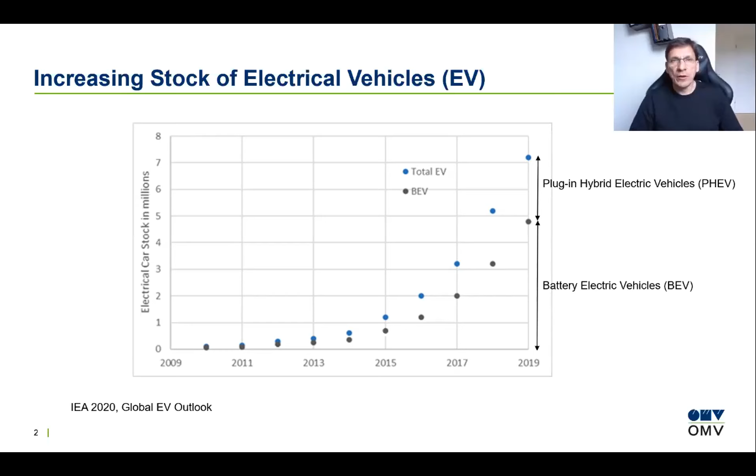In the last couple of years, we saw a strong increase in the electric car stock, now more than 7 million units. Most of these cars are battery electric vehicles, BEV, about 60%, and 40% are PHEVs. So what is the reason for this strong increase in electric vehicles? One of the reasons is the aim to reduce greenhouse gas emissions from private transport. But what are we actually doing when we shift away from internal combustion engines to electric vehicles?

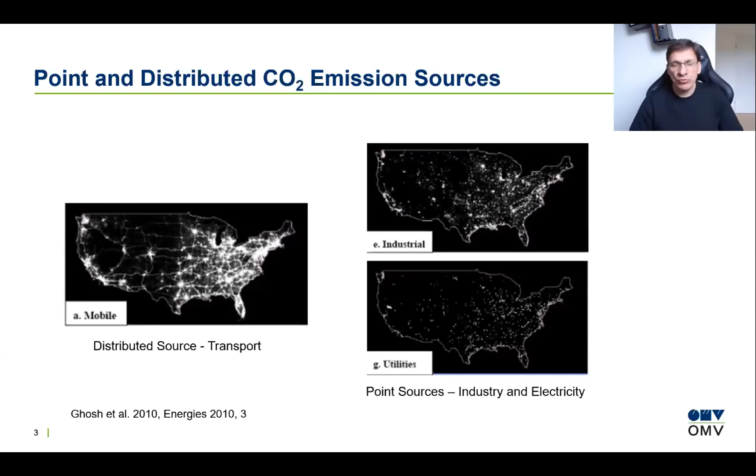There are two types of CO2 sources: distributed sources, for example public or private transport, shown on the left side. These sources are usually along roads and in cities, and they are very difficult to capture and reduce. And there are point sources, like industrial sources or sources from energy generation, where we could apply carbon capture and storage, for example. So what we are actually doing by having electric vehicles is shifting the distributed sources from the left to point sources on the right, which we will see in a moment in this presentation.

Here we compared three types of car users: small, medium and SUV car users. And we looked into three different types of countries: coal-dependent countries with high CO2 emissions of more than 700 grams CO2 per kilowatt hour, gas-dependent countries with 400 grams CO2 per kilowatt hour, and hydropower dependent countries.

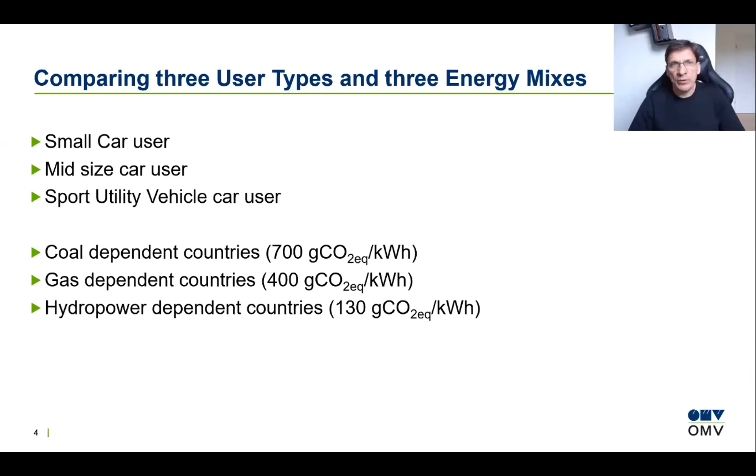So first we can compare the CO2 emissions from electrical cars with a certain electricity consumption in kilowatt hours per 100 kilometers to petrol cars with liters per 100 kilometers.

So if we take an electrical car with a consumption of 20 kilowatt hours per 100 kilometers on the y-axis, then we see this is equivalent to about 1 liter per 100 kilometers of a petrol car in a hydropower dependent country. For a gas dependent country, this increases to about 3, and for a coal dependent country, above 5 liters per equivalent per 100 kilometers.

What it means is if we are located in a coal dependent country and we are driving an electrical car which has a consumption of 20 kilowatt hours per 100 kilometers, it will at least emit as much as 5 liters as a conventional car with 5 liters per 100 kilometers. So this is the bare minimum it emits.

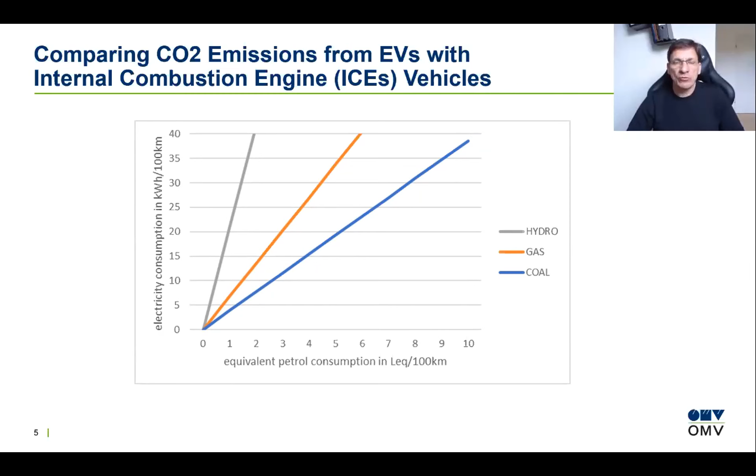In addition to that, we have the emissions from the battery construction. So here we are comparing CO2 emissions, incremental emissions, neglecting the emissions related to car manufacturing, as a couple of authors already showed that these are relatively equal for ICEs and EVs.

So on the left side we see the impact of different car types for gas-dependent countries. We start off with a legacy or an initial emission at year 0 because of the emissions related to battery construction. And then the slopes of the emissions depend on the car type and on the country type.

So here in the gas-dependent country, on the left side, figure A, we see that emissions from an SUV can amount up to 30 tons in the lifetime or in 10 years, even for a battery electric vehicle.

On the right side we see the impact of different electricity mixes, so here for a small car, emissions related to hydro power are small compared to other cases. Coal-dependent countries can have substantial emissions even for small cars.

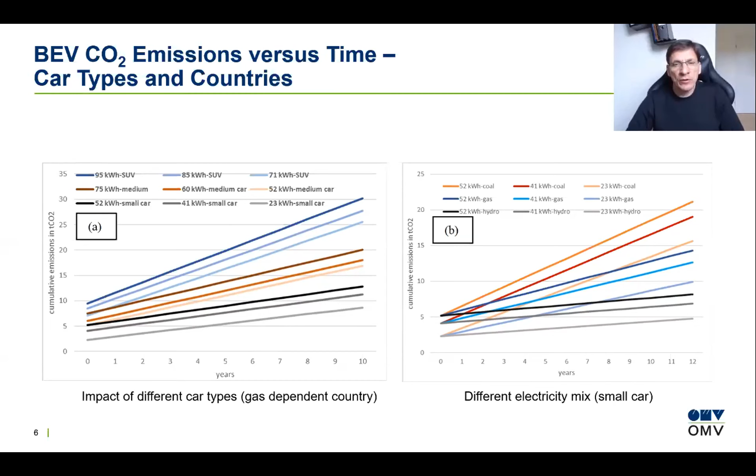For plug-in hybrid electric vehicles, there's one additional factor which we have to consider, and that's the electricity utility factor.

And first on this diagram on the left side we see the cumulative percentage of kilometers traveled versus driving distance. We see this type of diagram more often with the amount of trips versus percentage versus driving distance, and there the curve is increasing much steeper.

This means that only a very small percentage of trips is above 100 kilometers, and this is an important factor for battery electric vehicles because it gives us a feeling for how often we would need to change to other means of transportation or have to reload the car when we are traveling.

For PHEVs, the cumulative percentage of kilometers traveled is important, because here it says 50% of the trips have a cumulative driving distance larger than 35 kilometers.

Because we take into account that there are fewer trips, but with longer distances. And this can be used in addition to the driving patterns per day to come up with a utility factor, which means how many kilometers we are traveling electrically versus how many kilometers we are traveling with fuel.

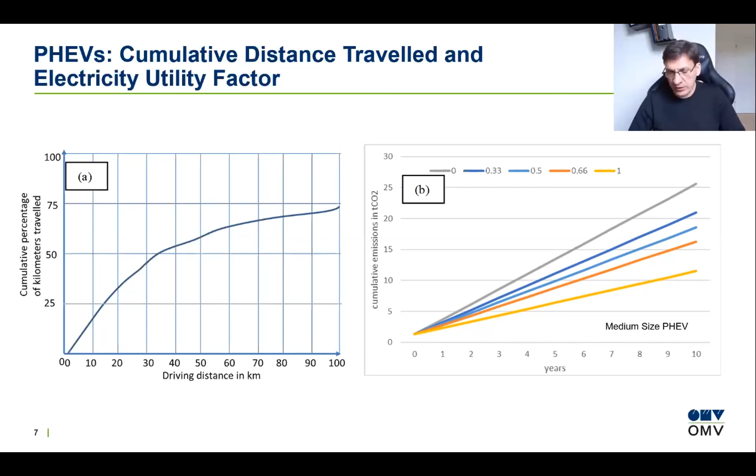So now when we compare the CO2 emissions of SUVs in this case, here we see on the left side for a hydropower dependent country, the ICE emissions, the orange dot would be 30 tons of CO2, lifetime CO2 emissions. BEVs have significantly lower CO2 emissions.

And PHEVs, for them it depends strongly on the utility factor. So for a 50% utility, the CO2 emissions would be above the BEVs.

The blue bars show the break-even time in years, and here, because of these initial CO2 emissions related to the battery construction, the break-even time for BEVs is somewhat longer than for the PHEVs. We also see that the break-even times, as well as the CO2 emissions, increase for larger battery sizes.

For coal-dependent countries, the situation changes. So in particular for larger size batteries in BEV cars, we have higher CO2 emissions for a lifetime or 150,000 kilometers compared to an ICE.

For PHEVs, they might be better off, in particular for higher electrical utilities. And the break-even times are significantly increasing for BEVs for coal-dependent countries.

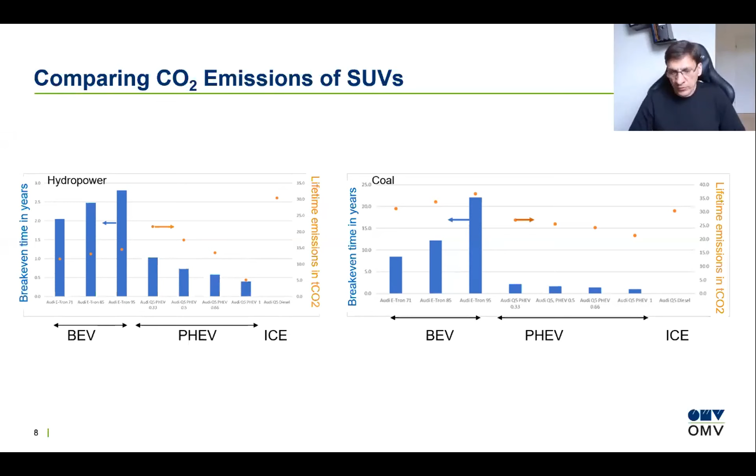Let's have a look at the sensitivity. So in a hydropower-dependent country, for BEVs, the strongest, highest sensitivity is related to battery production emissions. And we have less sensitivity with the dependency on the electricity mix or electricity consumption. The reason is, of course, because the energy mix is already so good.

With coal-dependent countries, we see that the lifetime emissions are significantly increasing compared to hydropower, and also the sensitivity increases. Here, the key parameter would be the electricity mix. So first of all, the electricity mix would be a good target to decrease the CO2 emissions from the electricity mix.

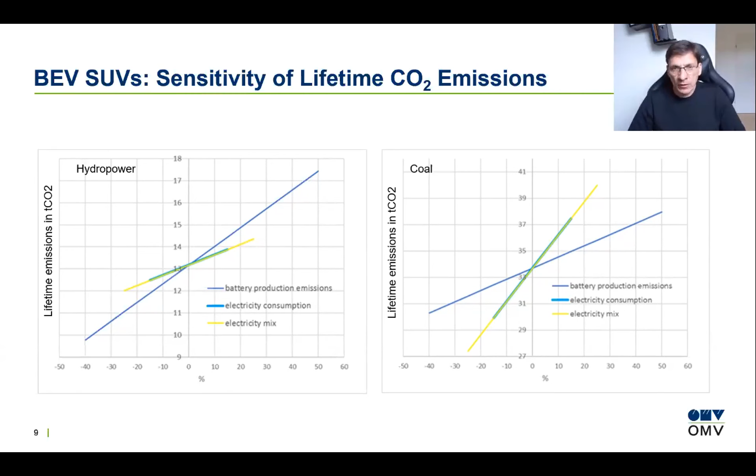For PHEVs, in both cases, the highest sensitivity is for hydropower, and coal and gas dependent countries in between, is fuel consumption. For hydropower, because the electricity mix is already so good, the sensitivity is not that strong for battery production, electricity consumption, and mix.

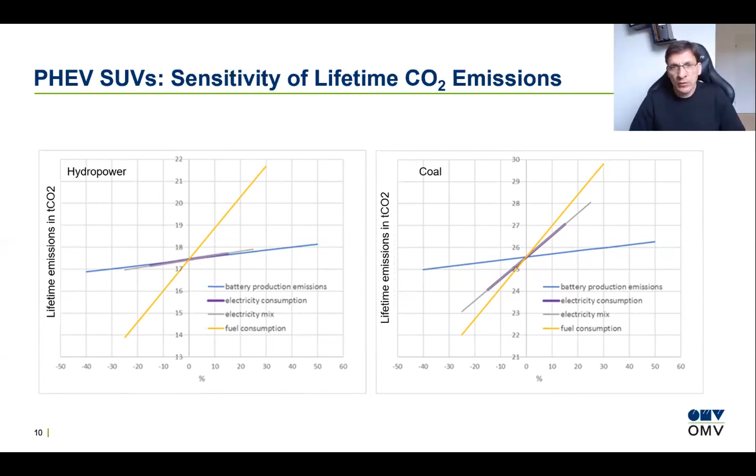For coal, the sensitivity of electricity consumption is almost as high as the sensitivity for fuel consumption. So it changed significantly from the hydropower dependent country.

So if we look at the generation of electricity, then there should be a big drive towards renewable energy, and there are, of course, different sources for renewable energy. Here is a case for solar energy in Austria. So we see on the left-hand side that most of the solar energy is generated at roughly 12 o'clock, with a decline in the morning or in the afternoon.

This pattern fits reasonably well to the percentage of cars traveling. So we see that at midday there are fewer cars on the road, so they would be there for charging. But there will still be a mismatch because most of the cars will, of course, be available later and will be charged later in the afternoon.

If we look at the difference between summer and winter, then there is a significant difference in the electricity generation. So this difference in electricity generation, we have to store. Wind energy is also not very stable, and the energy has to be stored.

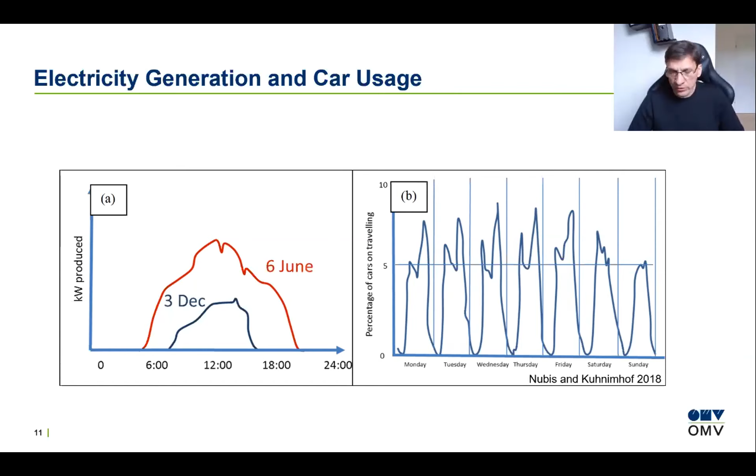How can we store energy? We could use pumped hydro, we could use compressed air energy storage, or hydrogen. For larger amounts, as we might need for deep decarbonization of public transport and private transport, hydrogen might be the method of choice. So we could store it in reservoirs and produce it back.

Another option is to decrease the CO2 intensity by CO2 geological storage. In view of time, I didn't cover that here. And that is in particular important for coal-dependent countries.

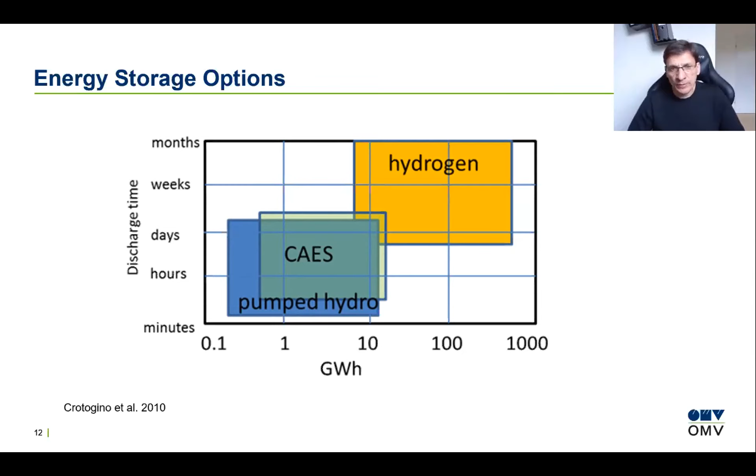So, as conclusions: EVs, when we use them, result in transferring distributed CO2 emissions to point sources. In most cases, EVs lead to a CO2 emission reduction compared to ICEs. For hydropower-dependent countries, substantial CO2 emission reductions can be achieved. The highest sensitivity is battery-related CO2 emissions, so these have to be tackled first.

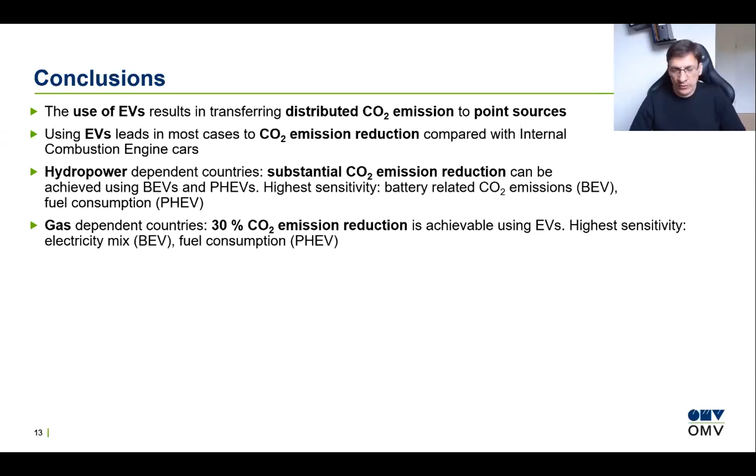For gas-dependent countries, about 30% CO2 emission reduction in our cases is achievable using EVs. Highest sensitivity is the electricity mix and fuel consumption for the PHEVs. For coal-dependent countries, the emission reduction for BEVs is limited, and in the worst case, the CO2 emissions might even increase for BEVs, in particular when they have large batteries. PHEVs, however, might still reduce emissions. Highest sensitivity is electricity mix and fuel consumption.

What we would need to judge the amount of CO2 emitted would be, in addition to the Worldwide Harmonized Light Vehicle Test Procedure, the fuel consumption of a PHEV driven with petrol only, and the electricity consumption of the PHEV driven electrically only. In addition, the CO2 intensity of the energy mix in the respective country should be given.

CO2 geological storage can be used to decarbonize the electricity mix, and this works in particular for coal-dependent countries, because in coal-fired power plants we have higher CO2 concentrations in the exhaust gases, which can be more easily captured and stored.

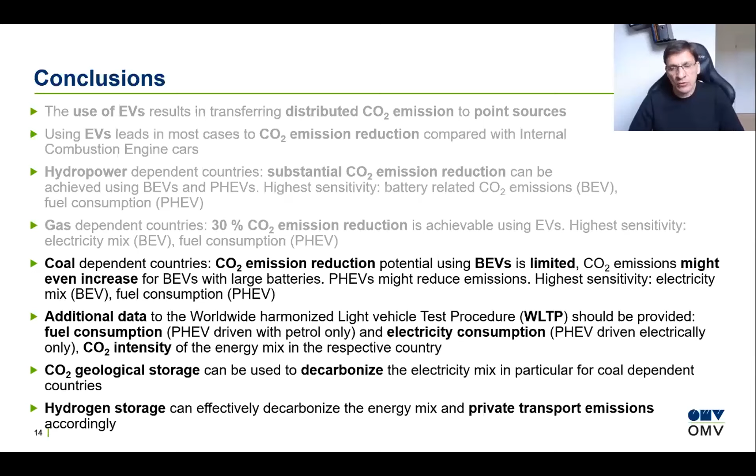Hydrogen storage can be a very effective way of decarbonizing private transport and the energy mix. With this, I would like to thank OMV E&P for the permission to publish the paper, and I'm looking forward to receiving questions. Thanks.

Maybe one more question from Habza Abid: as compared to ICE vehicles, do you take into account the reduction of components in battery electric vehicles?

No, we neglected this part. I've read a couple of articles where the difference was not that big, but this is something which should be taken into consideration. I guess it's a more second order effect.

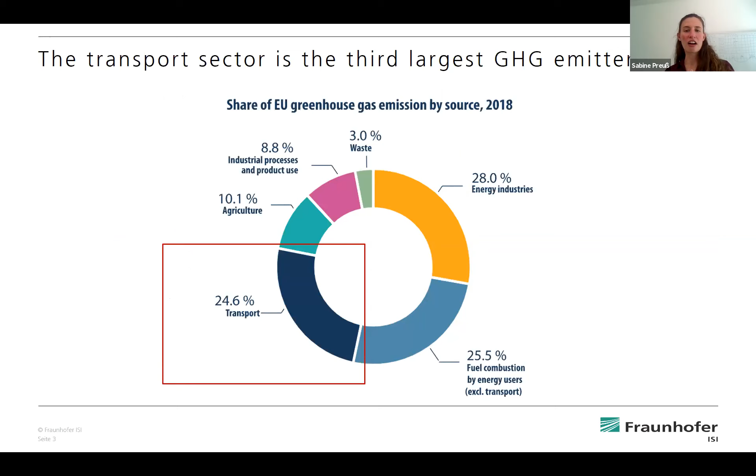However, there are alternatives, as you all may know, and especially after the last talk, you probably are aware of the different types that we have. We definitely need electric vehicles for the energy transition and for a sustainable future. So this talk will especially focus on these three types of electric vehicles.

So there are plug-in hybrids, which can be driven electrically or with conventional fuel like diesel. Then there are battery electric vehicles, which are completely battery electric. And the last one, especially important for our second study, are hydrogen vehicles, which are also electric vehicles but powered by hydrogen. They have the advantage that there are no long charging times.

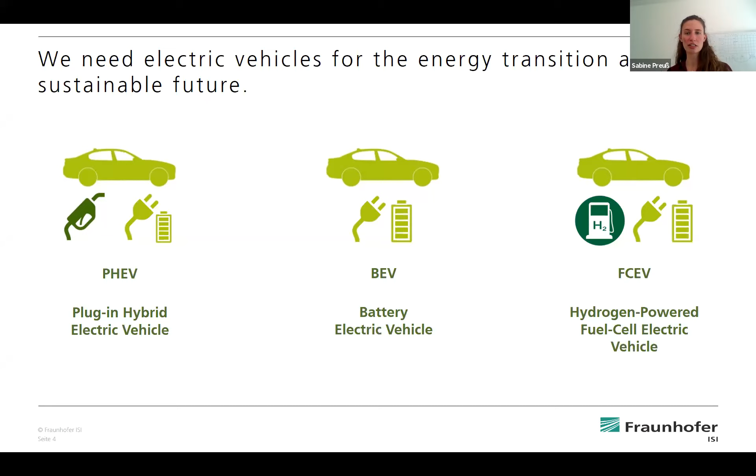So there are promising options to tackle climate change and reduce emissions in the transport sector. But if we look at the sales share in the EU for electric vehicles—battery electric and plug-in are often summarized as electric vehicles—worldwide the sales share is still below 5%. There is a steep increase from 2019 to 2020, but still it's really, really low. We are far away from our goals.

And of course we need to find ways to improve this adoption intention, or the adoption of battery electric vehicles. There are many variables that impact adoption intention, for instance different policies and subsidies, public funding. Also the context plays an important role. There's research that income and different socio-demographic variables have an impact. And there are also individual variables, for instance the perceived usefulness of electric vehicles.

And one of those individual variables may also be knowledge. So knowledge is the most important variable in this talk. And as I said, it is an individual variable, for instance such as perceived usefulness.

One theory that covers some individual variables pretty well is the diffusion of innovation theory by Rogers. For instance, it was found that compatibility in the theory has an impact, but also trialability, which is closely connected to knowledge. So the question that raises is, how exactly do we define knowledge?

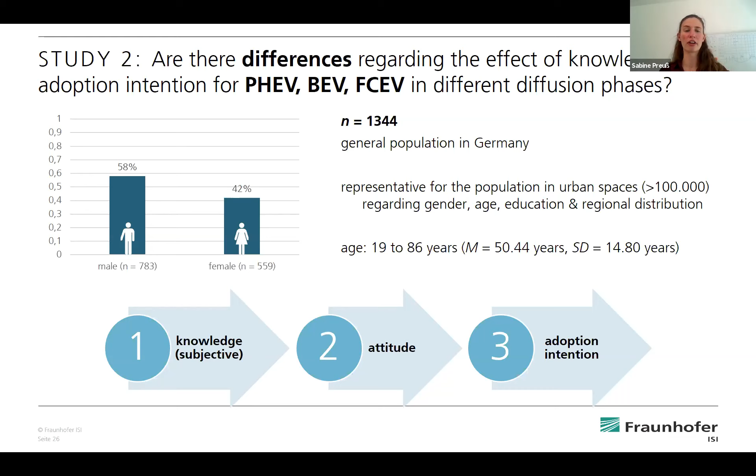And what did we do again? We had almost the same number of people, 1,344 from the general population, and this time it was representative of the population in urban spaces—regarding gender, age, education, and also regional distribution in Germany. The mean age was about 50. And this time we also adjusted the order of the different measures, and we replaced the measure of adoption intention to make it more methodologically sound.

What we found is that we replicated the results. Again, there is a direct and an indirect effect from knowledge on adoption intention, and this is true for all three types—not only for battery electric vehicles and plug-in hybrids, but also for hydrogen vehicles. The numbers are comparable, but for hydrogen vehicles the coefficients are even a little higher, which is surprising, I think.

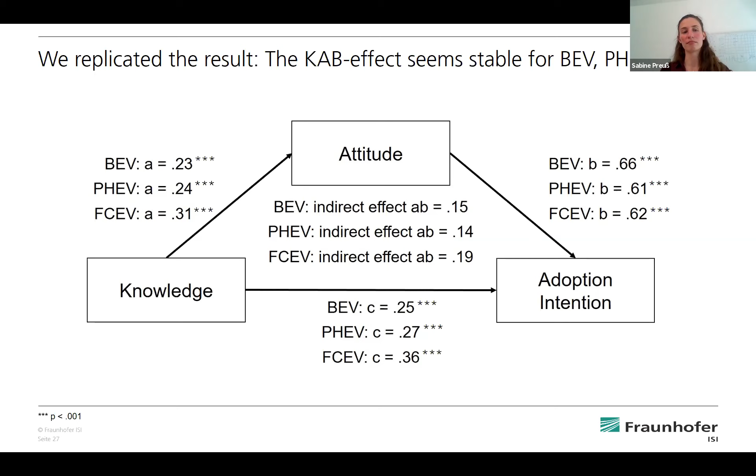It's also important to note that the descriptive statistics really significantly differed between the three types of electric vehicles. To sum up, in the second study we found again the direct and indirect effect for the different types of technologies in the different diffusion stages. So this replicates the results from earlier research, as well as our own research.

It also extends our findings a little, because now we know it can be transferred, and that it applies in study one for both subjective and objective knowledge. What we could have changed: there are no hydrogen vehicles yet available, or only partly available, so it's all a little hypothetical. Also, we measured adoption intention and not real adoption, and we only considered one mediator, attitudes. If you think back to the theory, it suggested we should consider several variables as mediators, so it could be helpful to add additional mediators to our model.

So, to answer the overall question—does knowledge really impact adoption intention or not—we can say yes, it does. But what can be looked at in the future is whether adoption intention can also be impacted for other technical innovations, and whether attitude and knowledge play an important role there.

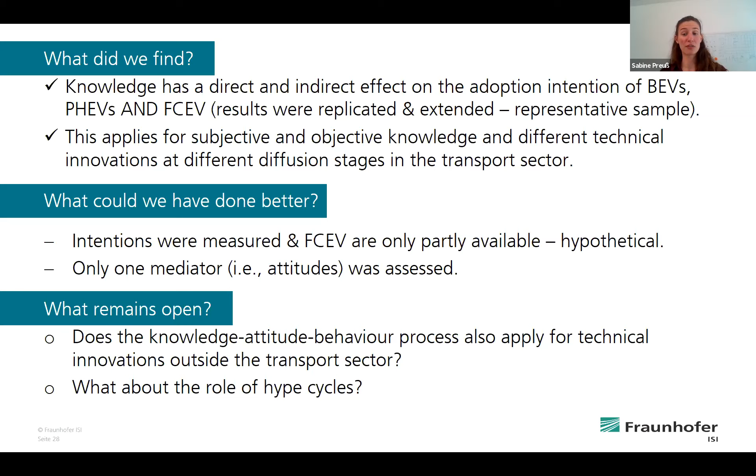And also the role of hype cycles and the media—is it important to really have this knowledge transfer for different vehicles and different types of vehicles? That should be tested in the future.

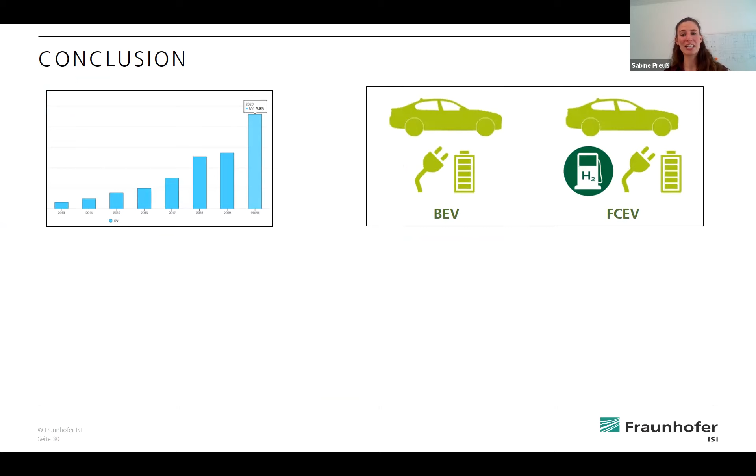So as a final conclusion: to accelerate the diffusion of sustainable cars, we don't need to consider the diffusion stages, but we should definitely consider knowledge. We recommend achieving subjective as well as objective knowledge, as well as creating a positive attitude, because all three had a significant impact on the adoption of electric vehicles and their different types.

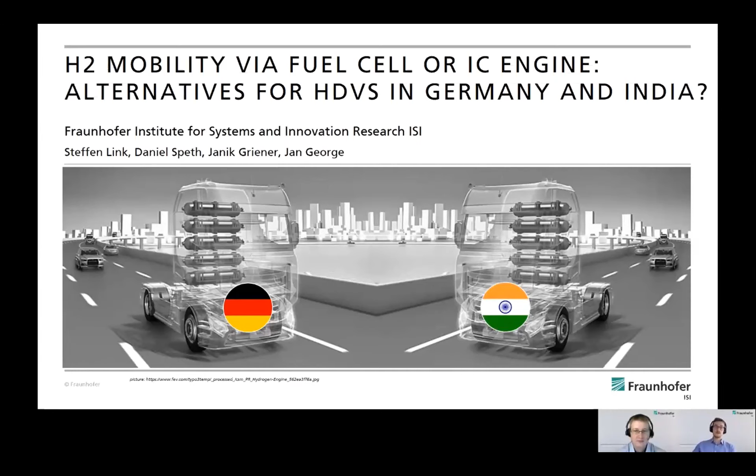Hello and welcome to our presentation. Today my colleague Daniel Speth and myself, Steffen Link, will give you some insights into our latest research project about fuel cells and hydrogen internal combustion engines to decarbonize road freight transport by heavy-duty vehicles. As global warming potential and environmental protection should concern everyone in the world, we will consider Germany as representative for a highly industrialized country and India as an emerging and fast-growing market.

The agenda for today: I will first tell you about our motivation, then subsequently about the methodology and the data we've used. Then I will hand over to my colleague Daniel Speth, who will tell you about our economic calculations for Germany and India. And then eventually I will conclude the presentation today.

About our motivation: on the left side you see the CO2 emissions by origin or producer. As you can see, transport is responsible for between 13% and nearly one-fifth of total CO2 emissions in India or Germany, whereas a huge share of these are emitted by heavy-duty vehicles, even though they only account for minor shares in the total vehicle stock - in Germany only about 10%.

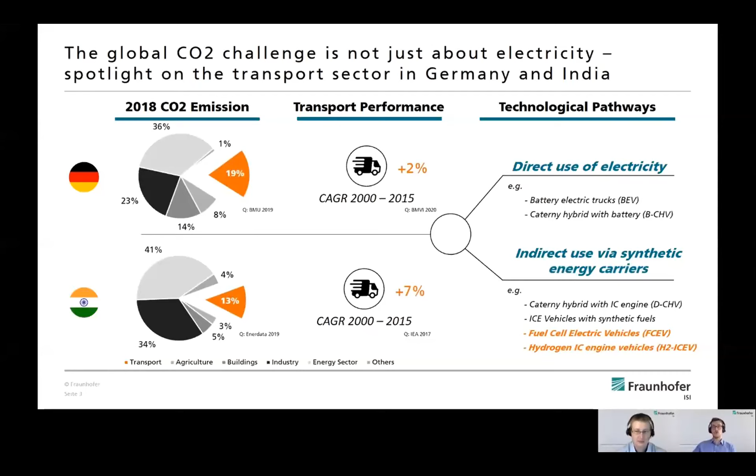What's aggravating the situation is indicated in the middle: road freight transport steadily and continuously increases. This is indicated by the CAGR, the average annual growth rate - for Germany, from 2000 to 2015, 2% per year, and for India even 7%. To decarbonize road freight transport, 2 technological pathways exist, and today we focus on the second path, which is the indirect use via synthetic energy carriers. Here we especially focus on hydrogen-powered vehicles, either fuel cell or potentially a hydrogen combustion engine.

About our methodology: our approach follows 6 major process steps. We first start with data collection, then statistical evaluation of this data - we adopted a meta-analysis and learning rate approach. Following that, we have the main part, the techno-economic calculations. Subsequently, we validated these with related studies and expert interviews, with experts from big OEMs, shippers, and carriers. This eventually leads to economic results, which, as an outlook, I will show you at the end of the presentation, and would ultimately lead to a market diffusion based on these costs.

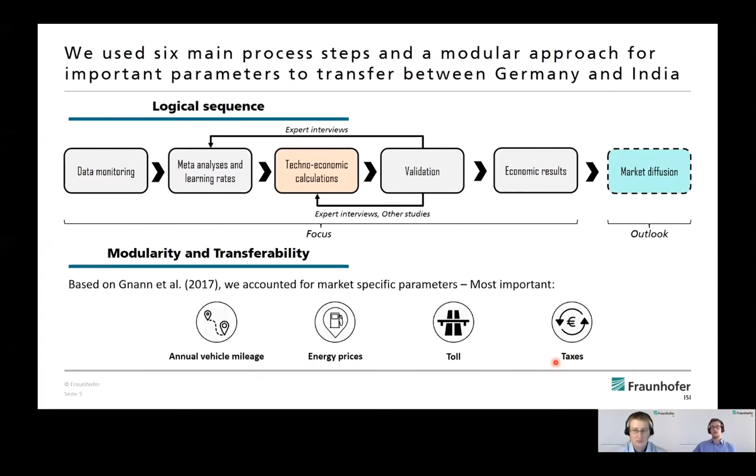Now let's come to our meta-analysis, which summarizes hundreds of different data points from other studies, expert interviews, and different sources. On the left-hand side you see the meta-analysis for fuel cell system costs, and on the right-hand side for hydrogen storage type 3 and type 4, which is highly compressed yet gaseous hydrogen.

You see the big spread here, which means there's high uncertainty. This is apparent, and it's also the reason why we did such an analysis and did not simply pull out any single data point from any study, to especially account for this uncertainty.

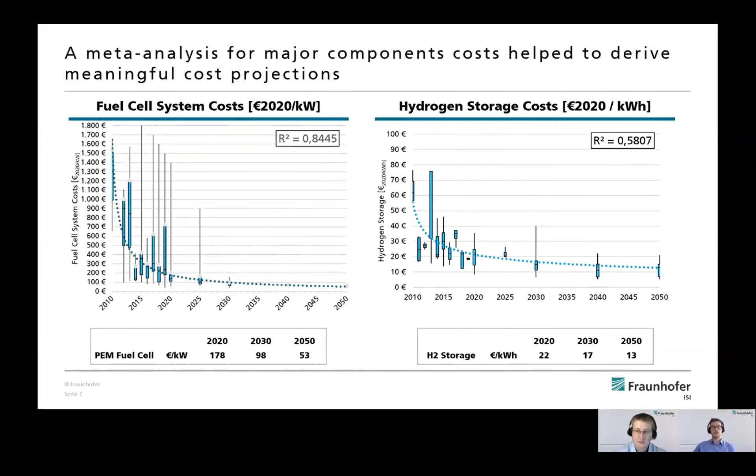Now let's come to the hydrogen ICE engine, which might be a possible enhancement for current diesel engines, because it's a concept based on conventional diesel engines where you have to adjust major systems like the ignition system, the fuel system, and engine control. You have to adjust the combustion process, but it's basically the same engine.

Ultimately, you can reach a higher efficiency. You have no CO2 emissions and only low NOx emissions. And what's a charming option is that you can adapt it very easily to existing engine production, and it's more durable than, in comparison, a fuel cell system.

What's a shortcoming today is that there's no real cost assessment available, which is why we've chosen a learning rate approach and used the similarity between the diesel engine and the hydrogen engine, determining the parameters from current EU6 diesel engines, yet scaled to a low volume hydrogen ICE production.

On the right-hand side you see our technical analysis and assessment based on individual component efficiency, and on the left side the total powertrain efficiency, which is lowest for diesel and highest for the fuel cell EV. As indicated here, the hydrogen ICE has a higher efficiency than the diesel engine.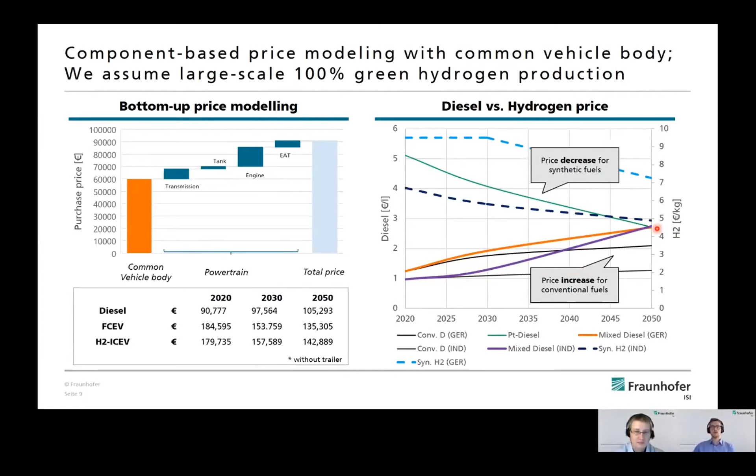There are two reasons for this. First, the purchase price for H2ICE and fuel cell electric vehicle will be higher than for diesel vehicle, even in the long term. Second, the energy costs for hydrogen, especially synthetic hydrogen, are quite high today, even though we considered the price cap in Germany.

However, sensitivities show that the fuel cell electric vehicle could be cost competitive in 2030 when driving high mileage due to comparatively high energy efficiency. In the long-term perspective, 2050, both hydrogen vehicles will be cost competitive compared to the diesel vehicle. Higher efficiencies and lower fuel prices make this possible.

They benefit from the possibility of making synthetic hydrogen available at a lower price than synthetic diesel. The fuel cell electric vehicle will come close to the TCO of today's diesel vehicle, even though we assume the comparatively high hydrogen price, approximately above 7 euros per kilogram.

Finally, from a cost perspective, the H2ICE is not competitive to the fuel cell electric vehicle under similar conditions due to its lower efficiency and a bigger hydrogen storage as a cost factor. However, if the range can be reduced, the H2ICE could be economically feasible. Additional aspects, like robustness, for example, for construction vehicles, could be an argument in favor of the H2ICE.

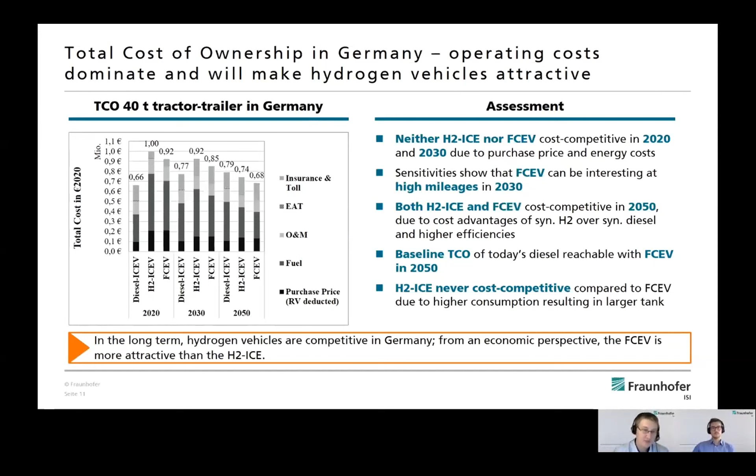Now you can see the same figures for India. The general trend corresponds to the development in Germany. Neither the H2ICE nor the fuel cell electric vehicle will be cost competitive to the diesel until 2030. In the long-term perspective, however, they will be the better solution in India too.

Due to lower vehicle mileage, approximately 75,000 kilometers per year, the total TCO per vehicle is lower. This is supported by low energy prices. The higher influence of the purchase price is a disadvantage for the more expensive hydrogen vehicles. However, the H2ICE with a comparatively cheap drivetrain could profit if the vehicle range, and with the range the tank volume, could be reduced. But in general, the overall assessment is quite similar to Germany.

Finally, I'd like to share some sensitivity calculations with you. I will present the results for Germany. However, the results for India are somehow similar and we added them to the paper.

On the left-hand side, we varied the annual mileage, the fuel price, and the vehicle purchase price by plus or minus 20%. Typically, the TCO of commercial vehicles is strongly influenced by operating costs. As you can see here too, the annual mileage has got the highest influence, followed by the fuel price. The effect is even stronger for fuel cell electric vehicles in the lower figure due to the higher efficiency.

For example, a 20% fuel price reduction reduces the TCO of the fuel cell electric vehicle by 10% and makes the vehicle cost competitive to the diesel. On the right-hand side, we calculated the necessary price reduction for the H2ICE to become cost competitive with the fuel cell electric vehicle. It amounts to approximately 38%, or more or less 50,000 euro.

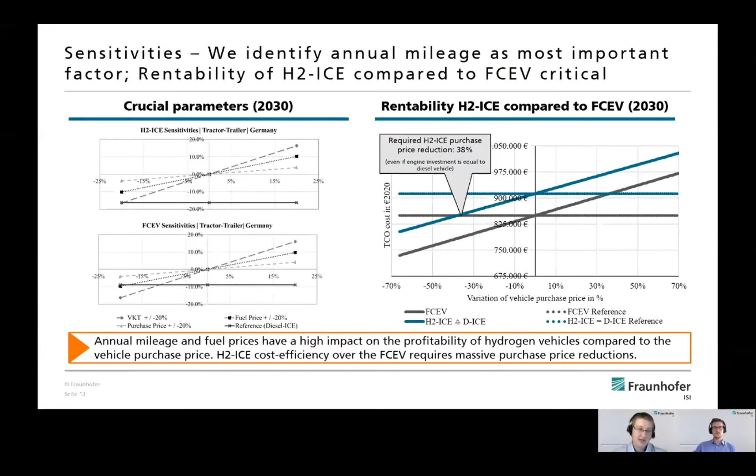This is roughly equivalent to the cost of the hydrogen tank in 2030. So all in all, the fuel price and the annual mileage are the most important factors to make hydrogen vehicles economically feasible. To make the H2ICE competitive with the fuel cell electric vehicle, massive purchase price reductions are additionally needed. So far, our main findings, and now Steffen will go on.

Thank you, Daniel. Let's conclude the presentation for today. What we find is that the fuel cell electric vehicle outperforms any hydrogen ICE and outweighs potential higher acquisition costs due to its higher reachable operating efficiency and its potentially lower mass market production costs.

What we also find, and what's very substantial, is that the costs for hydrogen storage are in some cases higher than the rest of the total powertrain, especially for the considered Type 3, Type 4 tanks here. So basically, as Daniel already indicated, there might be a technological change, as introduced by Daimler, to use liquefied hydrogen, or simply reduce the operating range from 1,000 kilometers to, let's say, 600 kilometers with one full tank.

What we also see, and that's already indicated by Daniel too, is that the hydrogen ICE might be an interesting gap technology because it increases the profitability of potential hydrogen refueling stations, accelerates and prepares the market diffusion of potential fuel cell electric vehicles. And because it's a more durable technology, especially for applications where the fuel cell might not be suitable due to problems with clean air, shocks and vibration, like for example in the construction industry, the H2 ICE engine might be a promising technology.

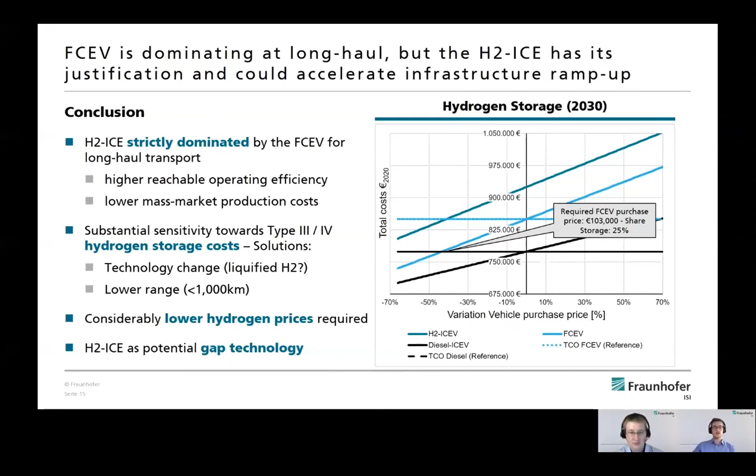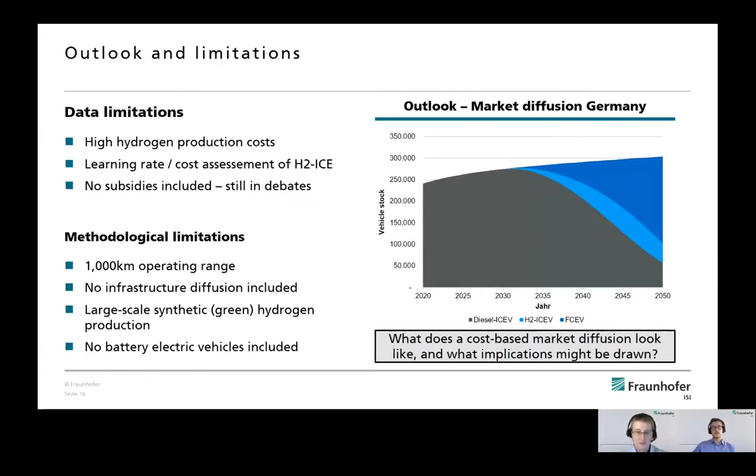As indicated here in the outlook for market diffusion in Germany, you see the three technologies, which is basically diesel, H2 ICE, and fuel cell, with a potential cost-based market diffusion. And what's apparently missing is battery electric vehicles, which are not included in our research up to date.

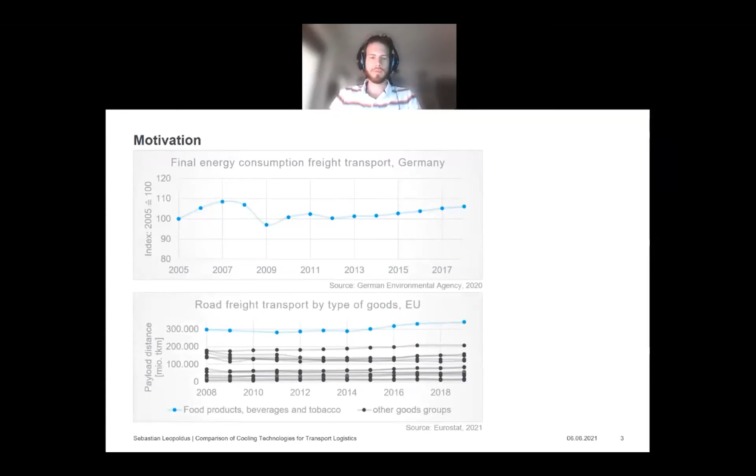Here you can see the final energy consumption in freight transport in Germany. After some ups and downs, it has constantly risen in recent years. If you look at the payload distance of road freight transport by type of goods in the EU, you will see that the goods group food products, beverages and tobacco is in first place ahead of all other goods groups. Moreover, about 1/3 of all food products transported require either cooling or refrigeration.

Today's standard technology for refrigeration on trucks is vapor compression refrigeration, abbreviated as VCR. About 90% of these VCRs are operated via a dedicated diesel engine, which produces relatively high greenhouse gas emissions. To achieve the energy and climate targets of the EU, further research on alternative cooling technologies is needed.

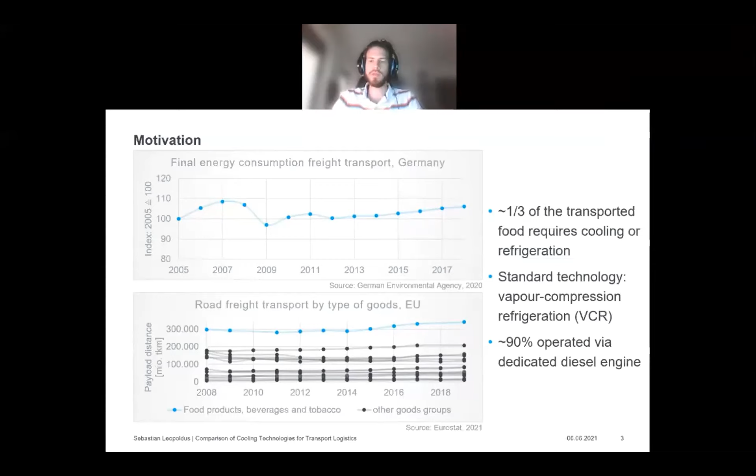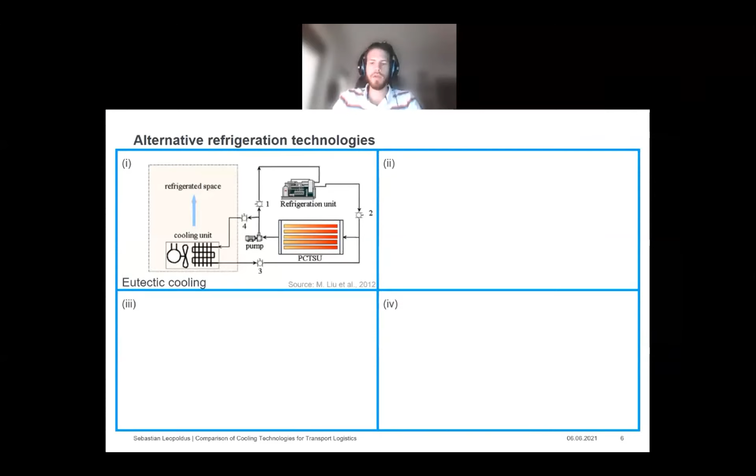In the following, I would like to present the alternative refrigeration technologies that I used for my comparison. The eutectic system consists of an on-vehicle phase change thermal storage unit, the PCTSU, which contains the phase change material, PCM, and an off-vehicle refrigeration unit, which is powered by electricity. The refrigeration unit charges the system, causing the PCM to change its phase from liquid to solid. When the truck is in operation, the PCM will change from solid to liquid, releasing a cooling effect and discharging the system.

Cryogenic cooling is achieved by the evaporation of cryogenic liquids, which are pumped from a tank to the sprayer unit that releases the liquids directly into the refrigerated space. As cryogenic liquids, I considered liquid CO2 and liquid nitrogen.

The next system is a vapor absorption refrigeration system, marked in yellow, coupled with a solid oxide fuel cell, marked in red. The vapor absorption system is similar to the VCR, but the mechanical compressor is replaced by a thermal compressor, shown in green. The thermal compression is carried out through a mechanism of absorption and desorption. The required heat in the desorber is provided by the fuel cell.

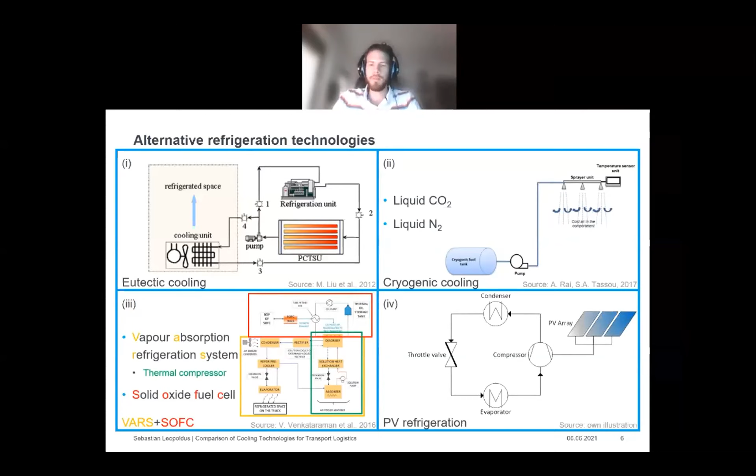The last system is the conventional VCR system, but the compressor is powered by electricity generated in PV cells mounted on the roof of the truck instead of an auxiliary diesel engine.

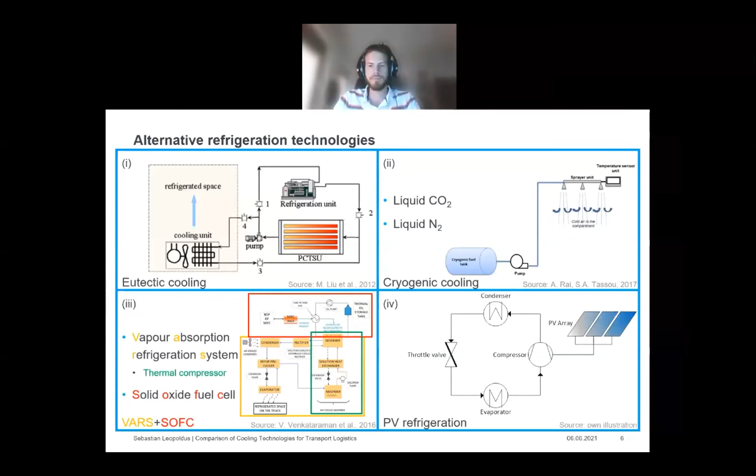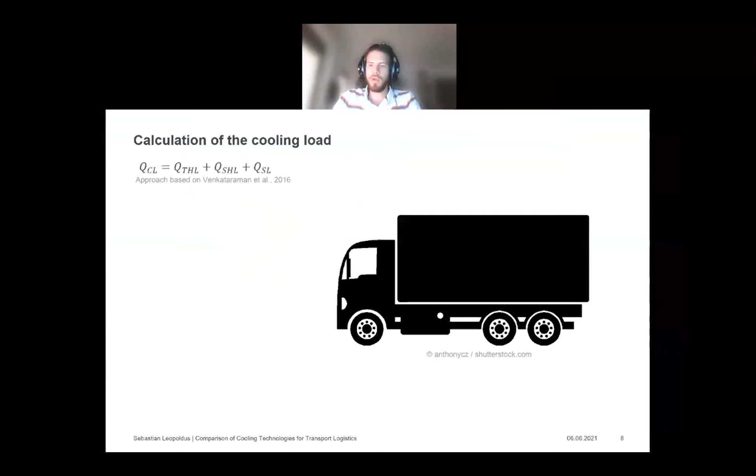Now I would like to explain how the required cooling load is calculated. For the calculation of the cooling load, 3 different heat sources are taken into account. First, the transmission heat load. It describes the amount of energy that penetrates the refrigerated space according to Fourier's law. It is a function of the surface area of the truck, the temperature difference between the ambient and the refrigeration temperature, and the thermal transmittance of the truck.

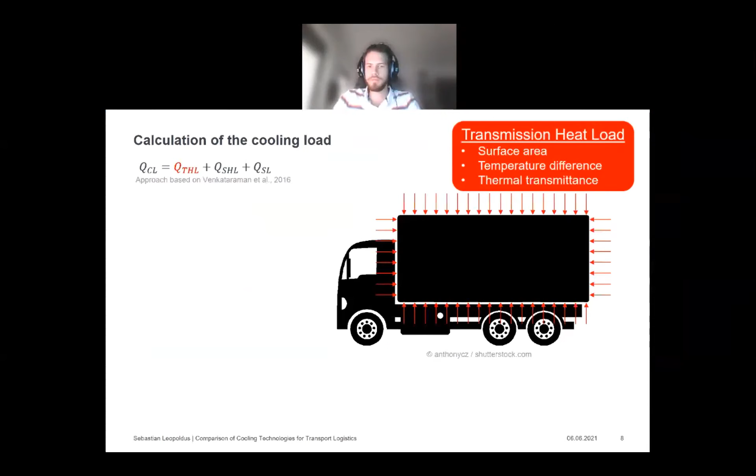Second, the service heat load. You can see the green arrows located at the back of the truck. It describes the energy intake caused by door openings. It is a function of the internal volume not occupied by cargo, the enthalpy change, and the time between door openings.

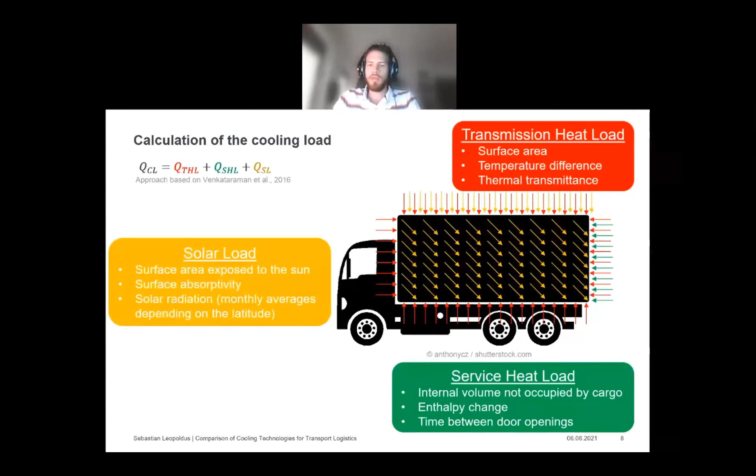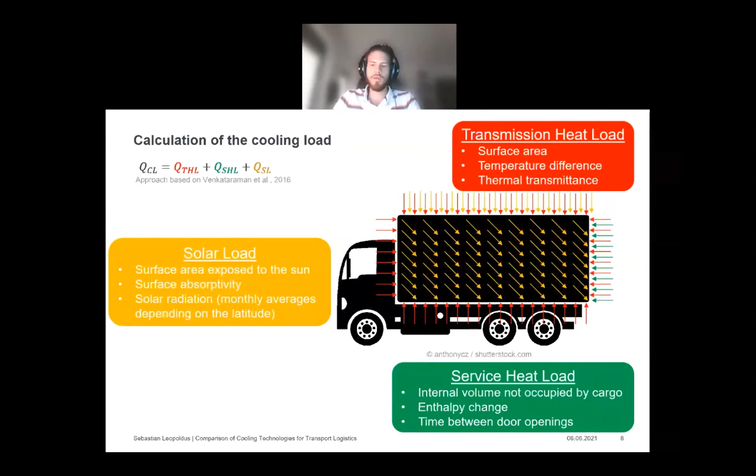And third, the solar load. This is the amount of heat penetrating the refrigerated space due to solar insolation. I assume that the roof of the truck and one of the sidewalls are always exposed to the sun. Other relevant parameters are the surface absorptivity of the truck and the solar radiation, where I use monthly averages that depend on the latitude.

Next, I would like to present the scenarios that were studied. I have considered two scenarios for a long-distance delivery characterized by a high average load, long times between door openings, and long duration of door openings, and two short-distance deliveries with a low average load, short times between door openings, and short durations of door openings. For both cases, a temperature of 0 degrees and minus 20 degrees Celsius is assumed, resulting in 4 scenarios. In addition, 2 different latitudes are considered: Hamburg in the north of Germany and Catania in the south of Italy, which results in 8 scenarios overall.

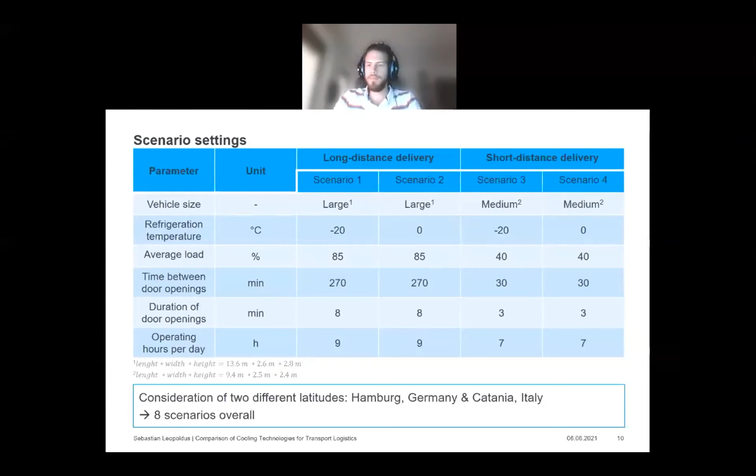Now I will explain to you what you can expect from the results.

For the environmental comparison, I considered the greenhouse gas emissions. They are divided into operational emissions, meaning the CO2 emissions related to the combustion of fuel and loss of refrigerant, and the production emissions. These are the emissions for the production of the working fluids. Emissions related to the production of the required hardware are not considered.

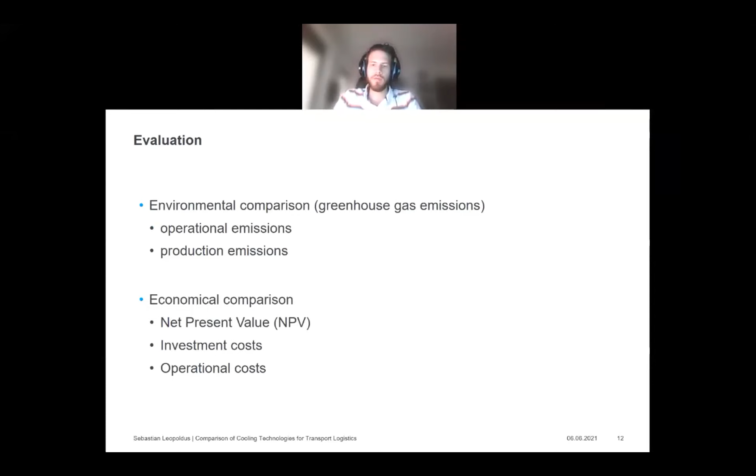For the economical comparison, I considered the net present value. The costs are divided into investment costs and operational costs, like costs for fuel or electricity.

Moving on to the results. We can see that the average monthly cooling loads in scenario 1 and 3, the scenarios with the lower refrigeration temperature, are higher than scenario 2 and 4, which is not very surprising. We can see that the required cooling load in Catania is generally higher than in Hamburg, which is also not surprising given the fact that Catania is closer to the equator. And we can see that the cooling loads for the scenarios with the refrigeration temperature of 0 degrees Celsius do not differ significantly between long and short distance deliveries.

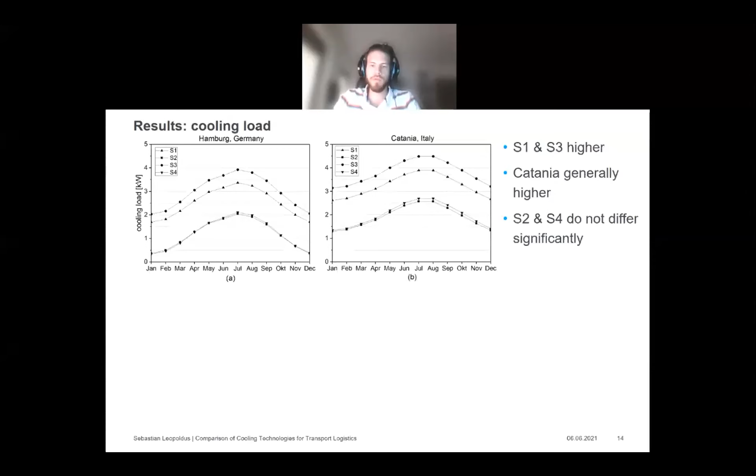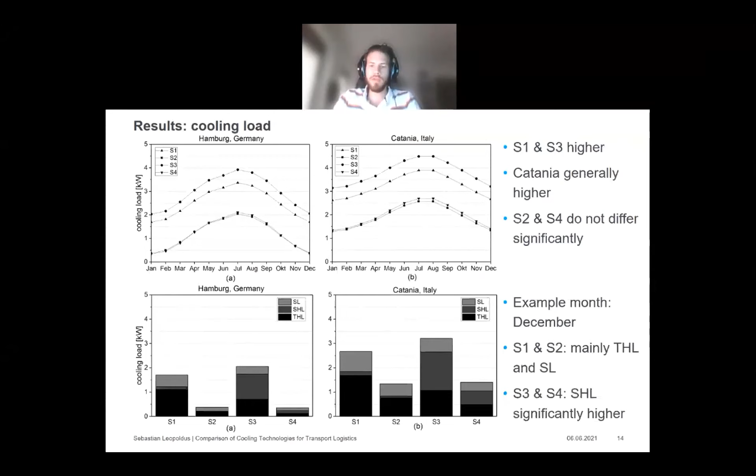Here you can see the composition of the cooling load in December. We can see that the long distance deliveries, scenario 1 and 2, are dominated by the transmission and solar heat load, because the truck and therefore the surface in these scenarios is larger. For the short distance deliveries, scenario 3 and 4, the service heat load increases significantly due to the frequent door openings.

Regarding the annual greenhouse gas emissions, you can see scenario 1 on top representing the scenario with the highest emissions, and scenario 4 on the bottom representing the scenario with the lowest emissions. Cryogenic fluids do not have operational emissions, but very high production-related emissions, because this technology is very mass-intensive. Both the VCR and the absorption refrigeration system have high operational emissions, because these systems produce CO2 directly through their energy supply via diesel engine or fuel cell. The eutectic and PV system are the most promising in terms of greenhouse gas emissions.

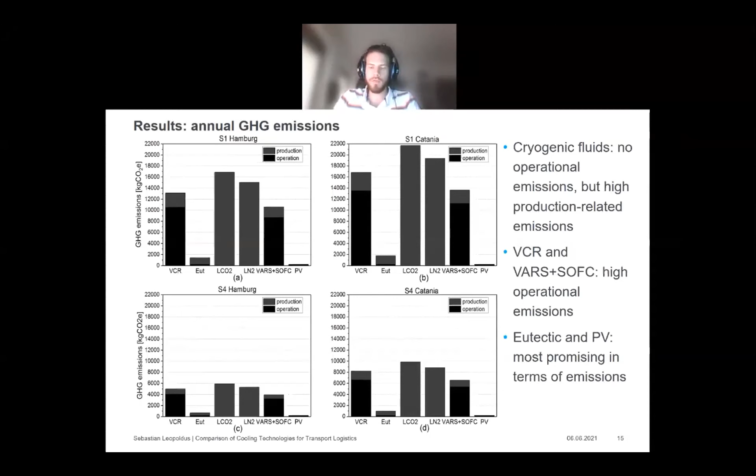Next, I want to talk about potential limits for the PV-driven VCR system. In this table, you can see the coefficient of performance, the COP, that would be necessary to satisfy the cooling load in the respective scenario for a certain month. Just in case someone doesn't know, the COP is an indicator that describes how efficient a refrigeration unit is operating. While the COP can reach values above 4 in stationary applications, it is usually significantly worse in mobile applications, which is due to the vibrations in the vehicle, for example. This is why I assumed that a COP above 2 is difficult to achieve, and a COP above 2.5 cannot be achieved at all in mobile applications.

Surprisingly, the systems are performing better in summer than in winter. The significantly higher cooling demand in summer can be satisfied because the energy intake from the PV cells is also significantly higher.

It should be noted that other systems are also limited. For example, the eutectic refrigeration is limited by the size of the storage unit. When the truck is stuck in a traffic jam and the system needs to be recharged again, it could happen that the required refrigeration temperature cannot be held.

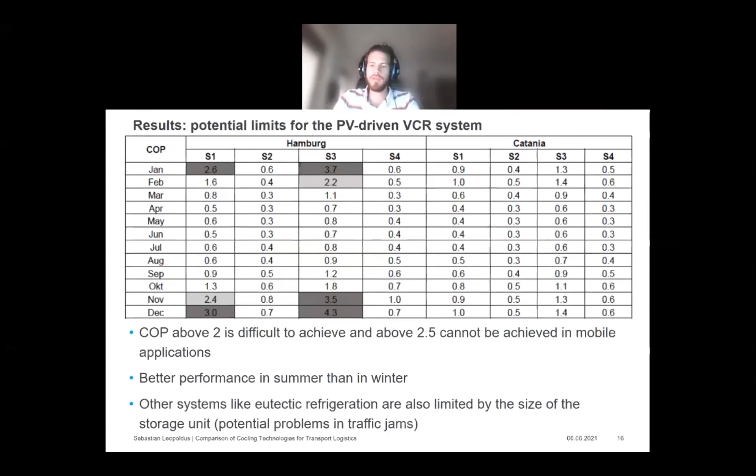For the economic analysis, I used the net present value. Again, you can see the scenarios 1 and 4. Since only costs but no revenues are considered, the NPVs are negative. This means the closer to zero, the more profitable the system is.

The PV system requires the largest investment in the beginning, but is the only system that shows an upward trend due to its low operational costs.

As already mentioned, the cryogenic systems are highly mass intensive to satisfy the required cooling load and therefore have high operational costs, which makes them the most expensive system in most scenarios. When interpreting this analysis, it should be noted that the costs of alternative technologies may fall as market penetration increases.

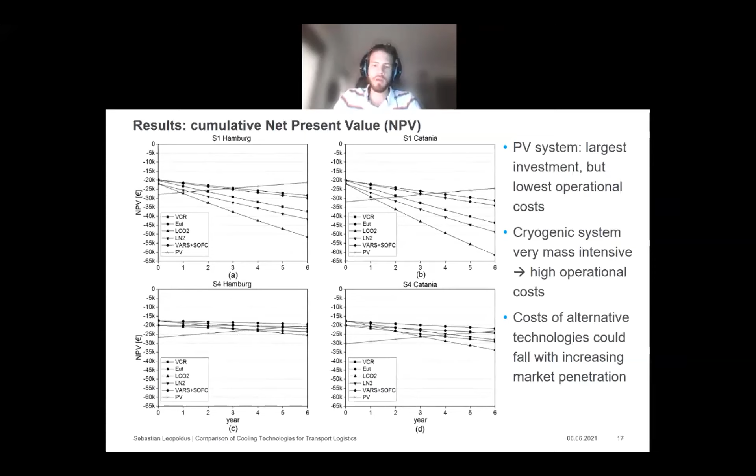Finally, to the conclusion. Cooling with cryogenic liquids is highly mass intensive and therefore causes more greenhouse gas emissions than the VCR system in the studied scenarios. Eutectic cooling systems, as well as the use of PV electricity for an electric VCR system, seem to be the most promising solutions in terms of emissions and cost reduction. But challenges are arising for the PV system from the strongly fluctuating available solar electricity.

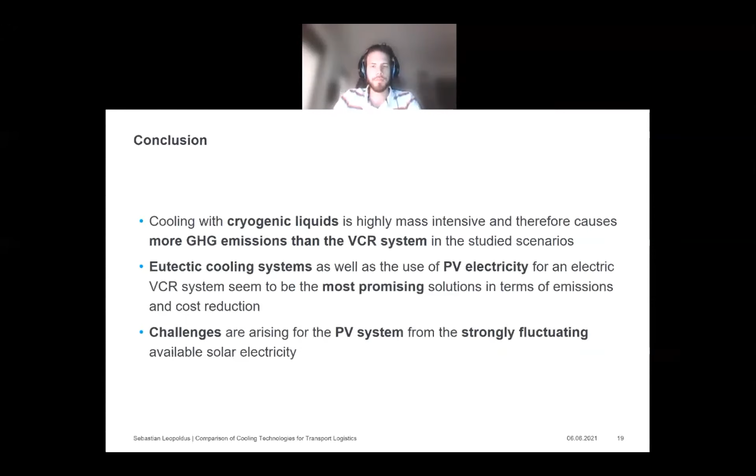Thank you very much for your attention. I'm happy to answer your questions if you have any.